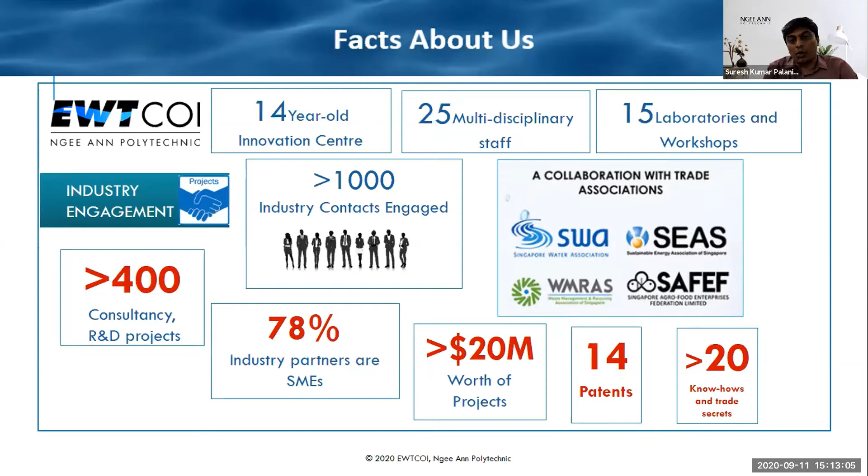We have 78% of industrial partners from SMEs. Out of it, we have secured more than 20 million worth of projects. We have 14 patents and more than 20 know-how and trade secrets. We also have good collaboration with trade associations like SWA, SEAS, and WMRAS.

In EWTCOI, we have 4 technological domains: membrane technology, energy efficiency, water technology, and sustainable material technology. We work on 3 thematic areas: membrane and water innovation, industrial resource innovation, and green building innovation. Today, I am going to talk about our sustainable material technology, where I'm working.

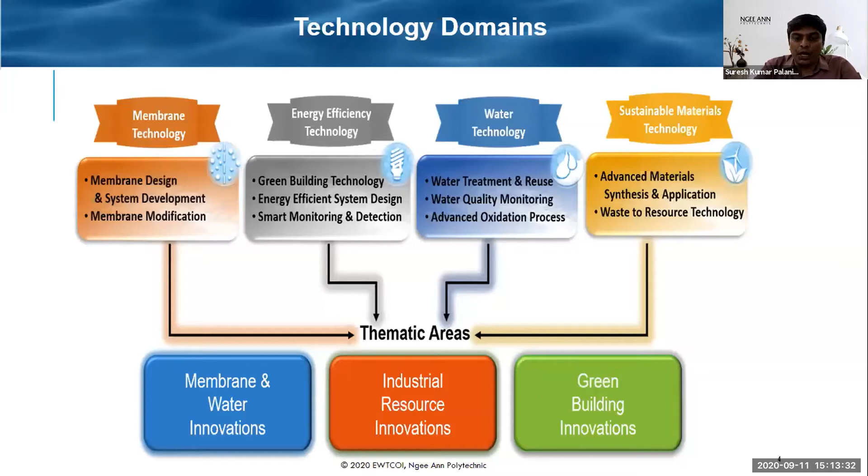Sustainable material technology has 3 focus areas: waste management and recycling, which works on lightweight concrete and foam glass material from waste glass; advanced material from CNT and activated carbon; and we also started working on sensors and supercritical extraction.

We are also working on sustainable eco product and process, in which we are working on smart coatings and cool paint, which have the functionality of self-cleaning and anti-reflective coatings. The key idea is we are working on nanofiber, and it's related to IAQ.

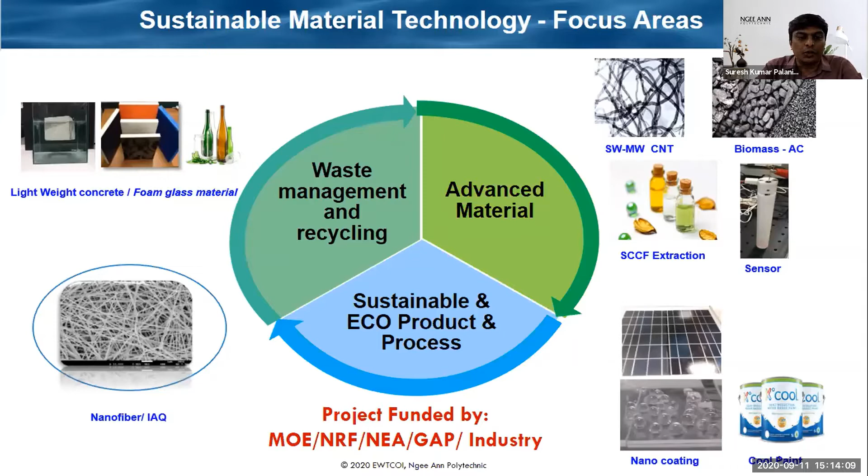All these projects are funded from government agencies and industrial projects. The general facts and stats of IAQ: according to WHO, every year 7 million deaths are due to indoor and outdoor air pollutants. Of those, 1.6 million are due to indoor pollutants, because we spend almost 90% of our life indoors.

Based on the literature, it is found that indoor environment can be up to 50 times more polluted than outdoor. So poor indoor air quality will cause sick building syndrome due to headaches, eye, nose, or throat irritation, and also respiratory problems. This will lead to productivity loss.

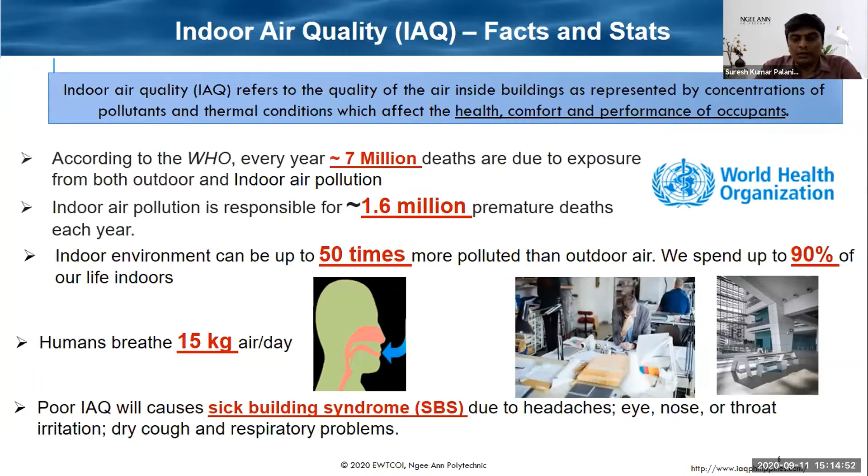So why does indoor air make us sick? There are 6 key components: odor, volatile organic compounds from furnitures and construction materials indoors, fine particulates from smoke or cooking areas, microfibers, mold from indoors, and nanosized particle pollutants from the outdoor environment.

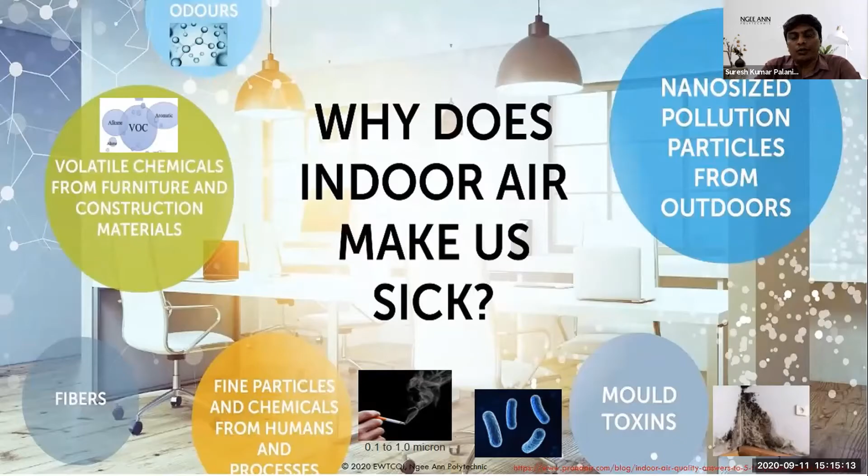So in EWTCOI, we have nanofiber technology for air filtration. This nanofiber has a key advantage over existing fibers. For example, microfibers like melt blown cannot filter out particles of 2 micrometers, whereas this nanofiber has a key advantage.

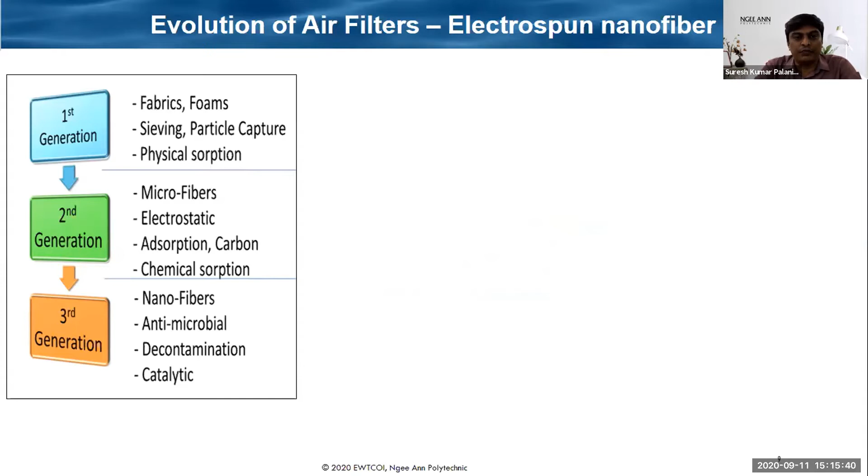It has antimicrobial functionality, decontamination, and catalytic functionality. The key thing is nanofiber can be developed using the electrospinning process. Based on recent literature, this nanofiber has a market potential of 3 billion by 2024.

The key advantage of nanofiber is it can be produced as both polymeric and hybrid nanofibers. It can control different nanofiber structures. We can embed this nanofiber with metal particles and nanomaterials, and we can tune the nanofiber size as low as 50 nanometers, and then also tune the pore size at the nanometer scale.

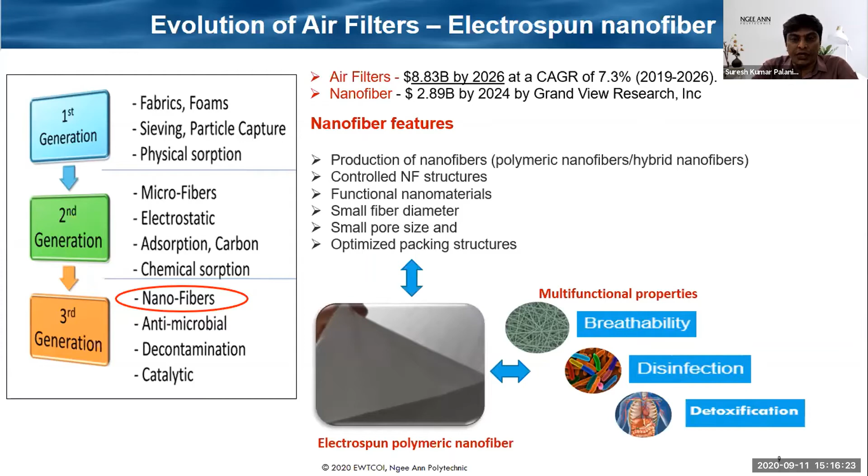We can also optimize the packing structure of this nanofiber into stacks, which has multifunctional properties like breathability, disinfection, and detoxification. This electrospinning process has 3 different parameters: solution property, process conditions, and ambient condition. By tuning these process conditions, we can optimize the fiber diameter to as low as 50 to 100 nanometers, with increased surface area for selective VOC or other pollutant capture.

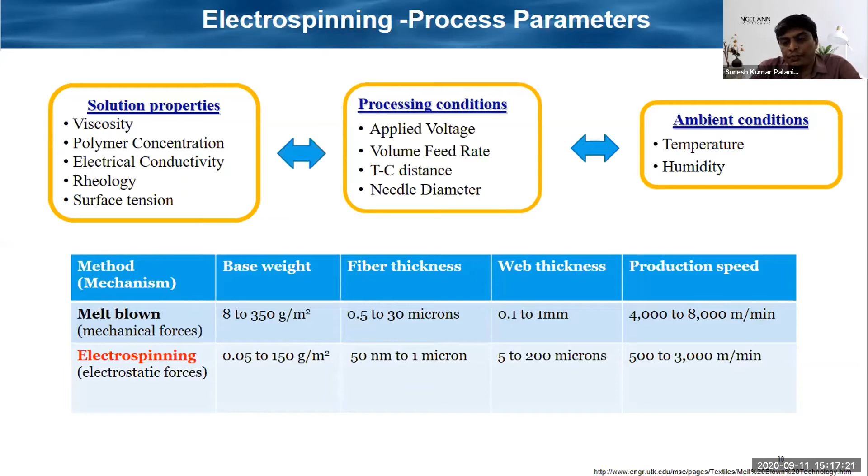The productivity range of melt-blown is around 4,000 to 8,000 meters per minute, whereas electrospinning is around 500 to 3,000 meters per minute. However, there are companies working on production of this nanofiber at a higher rate.

In EWTCOI, we have two patent background IPs on nanofiber: one on preparation of nanofiber and the other on production of nanofiber. One project is funded by NRF, where we work on triple layer nanofiber filters, which have specific functionality beyond particle filtration and bacterial filtration efficiency. This nanofiber has a detoxification efficiency of more than 95%.

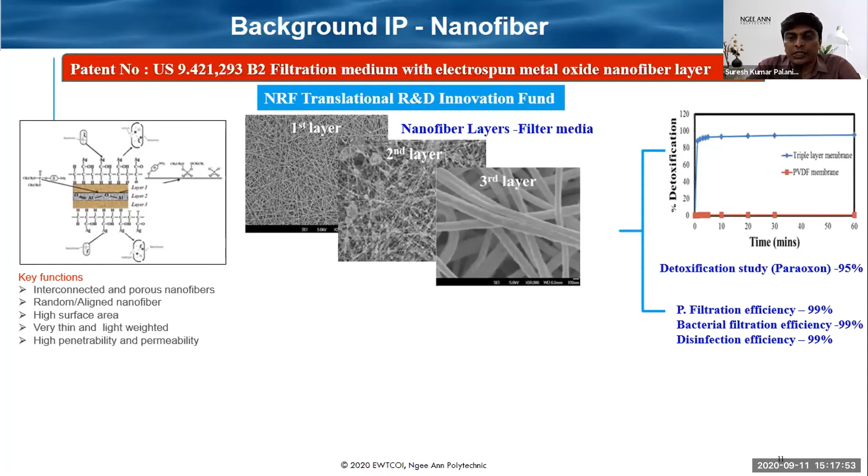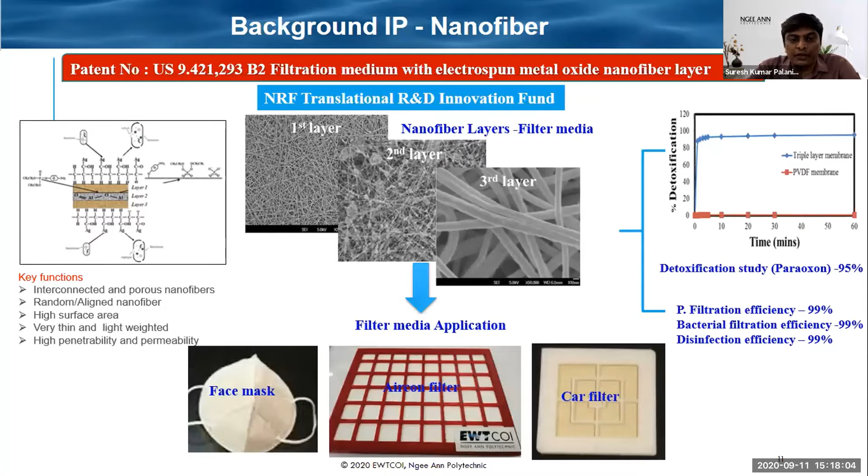We studied with Paraoxon as a nerve agent, which shows this triple layer with metal oxide embedded particulates has an efficiency of 95%. We are looking at applications like face masks, aircon filters, and car filters.

The basic comparison of our nanofiber with existing filters and face masks shows our nanofiber-based triple filter has aerosol filtration efficiency of more than 99%, and bacterial filtration efficiency more than 99%. However, the added advantage over other filters is additional disinfection and detoxification efficiency. The key advantage is we found no leaching of any heavy metal ions from our fibers.

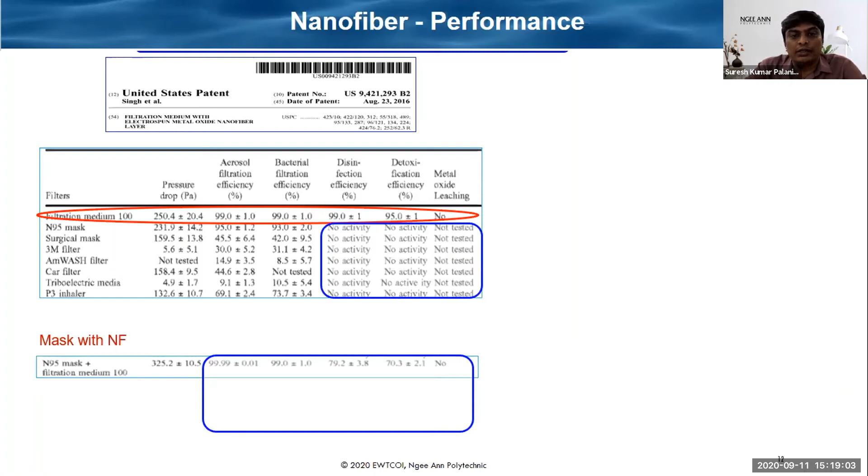This figure shows existing masks and filters which have no disinfection or detoxification activity. We also have the advantage that this nanofiber can be embedded in masks, and we tested it with commercial N95 masks with our nanofibers, showing improved aerosol filtration efficiency of more than 99.99%, while also adding disinfection and detoxification functionality.

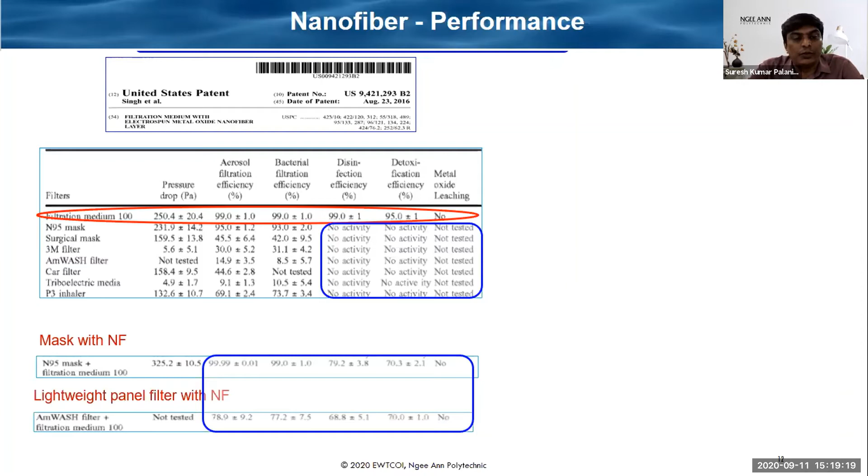For this N95 mask, we observed efficiency of 79% for disinfection and around 70% for detoxification. We also tested the nanofiber with lightweight panel filters, where the efficiency for disinfection and detoxification is around 70%.

We also found recent literature on breathability comparing nanofiber filters and melt-blown filters, which clearly shows nanofiber has a better advantage over melt-blown filters. The air and moisture transmittance, and odor-related CO2 transmittance, are more comfortable with nanofiber than melt-blown filters.

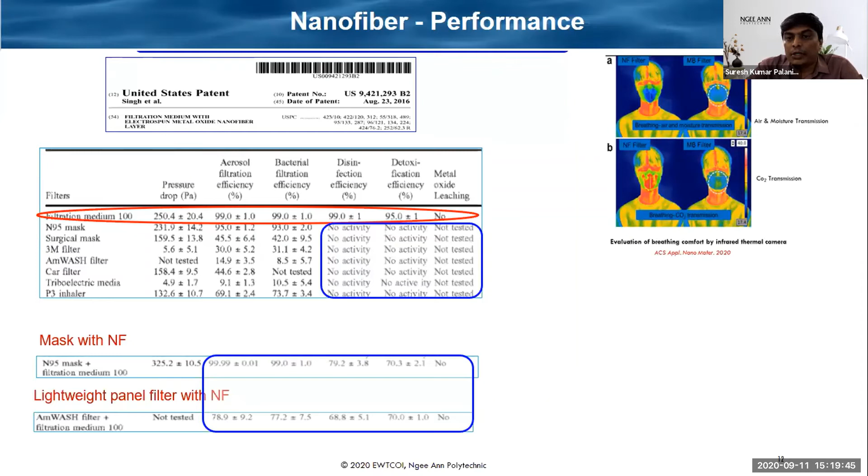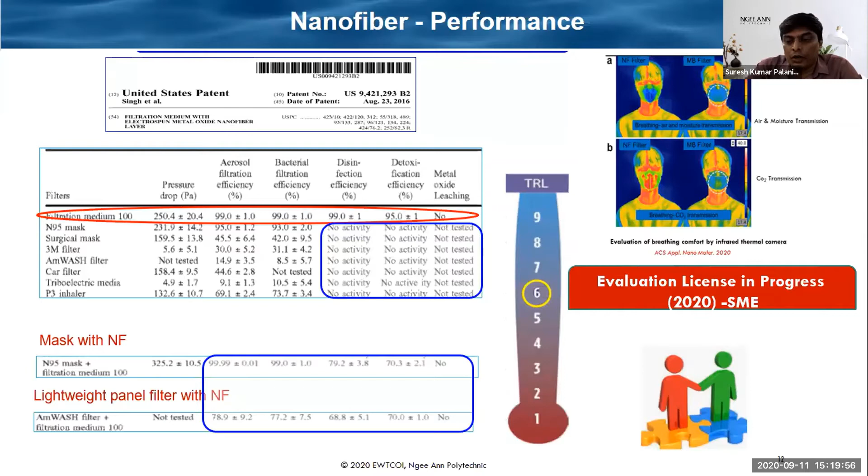Right now, the IP is at TRL 6 and above. We are working closely with local SMEs on evaluation and licensing, and we are now planning for scale-up and testing of this IP.

We have a second IP on the production of nanofiber, specifically the continuous production of nanofibers. We already developed a prototype setup in our lab, and we have also demonstrated this system in an operated environment.

At the current rate, our in-house setup is producing around 700 meter square per hour. However, we are openly looking for an industrial partner who can scale up for a higher production rate, and also looking for advanced technology.

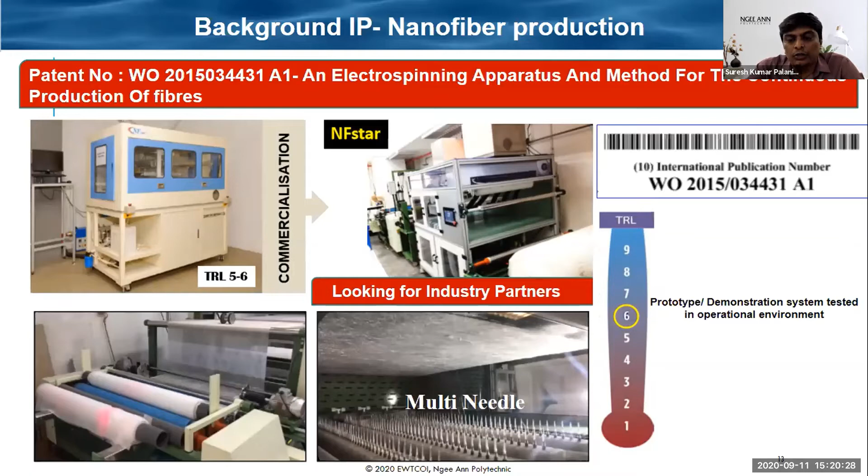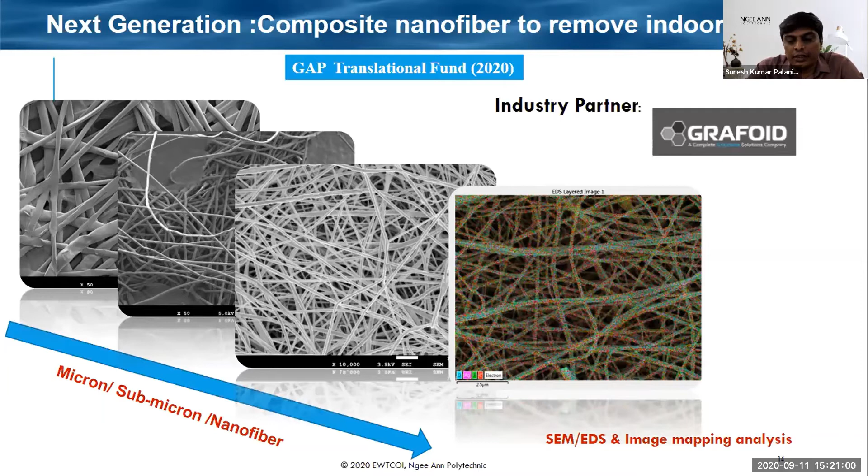Next, we are working on next generation composite nanofibers to remove indoor pollutants. This project is funded by GAP this year, in collaboration with an industrial partner, Grafoid, a manufacturer of unique graphene-based nanomaterials with different porosity. We are already in progress working on a few membranes of these graphite-based nanofibers, trying to apply next generation reusability and flexibility of nanofibers with high mechanical strength.

Other than nanofiber, we are also working on nanocatalytic filters for high indoor detoxification, targeting applications like indoor cooking facilities. The main advantages of this filter are that it is flexible, washable, thermally stable, and has a high surface to volume ratio.

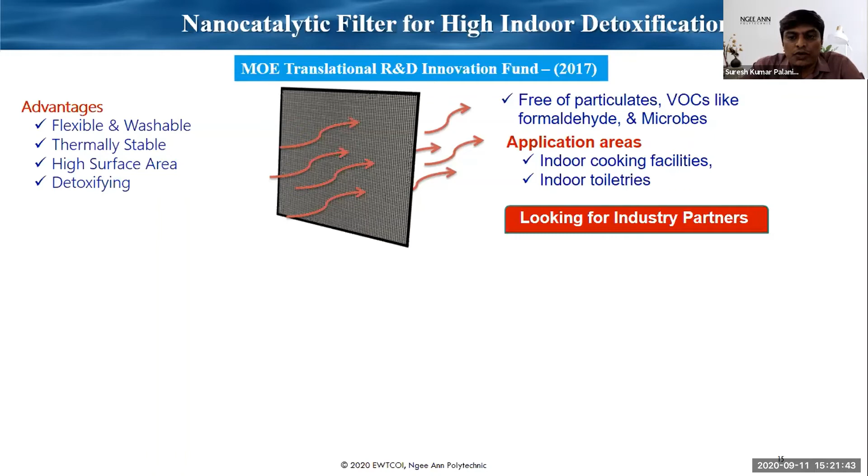We have our own coating functionality where we coat the surface of these flexible metal filters. We are also looking for an industrial partner who can work with us to test these filters at the site and perform evaluation. This is an example of different nanostructure materials on a metal mesh.

Apart from technological capability, we also have IAQ testing capability at EWTCOI. We work on the Singapore standard SS554. These are the test parameters we closely consider for performance evaluation of systems, like thermal comfort and chemical parameters such as carbon monoxide, carbon dioxide, formaldehyde, total VOC, and ozone.

These are the parameters we can test in our lab to evaluate system performance. In terms of particulate matter, we can test for PM10 and PM2.5. We even have equipment that can go down to ultrafine particles, from PM0.1.

So we also have equipment like biological parameter testing. We can test the bacterial and fungal counts.

BCA has a green mark scheme since 2005. So one of the key things is to have environmental friendly buildings, and key assessment criteria for BCA green mark is you should have indoor environmental quality for better health and well-being.

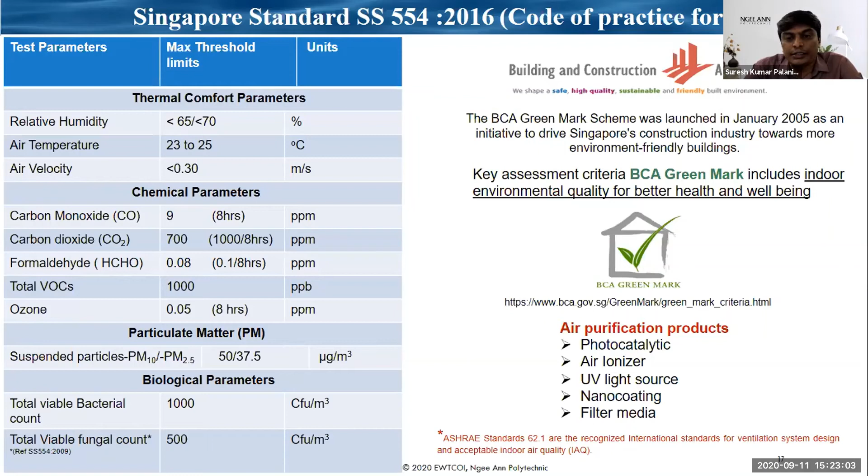So we are in the range of testing different kinds of air purification products like photocatalytic based air ionizer, UV light source, nano coatings, and filter based media. We are open for testing any kind of this product with respect to the standards of Singapore.

So IAQ testing for filter media, we have an automated filter testing system in our lab, which can measure the filtration efficiency and the pressure drop of filters with particle sizes from 0.1 micrometer to 0.3 micrometer, both solid and liquid.

We can also perform VOC studies of any filters with a specific concentration of VOCs like formaldehyde and toluene indoor VOCs, and we can evaluate the performance of those filters.

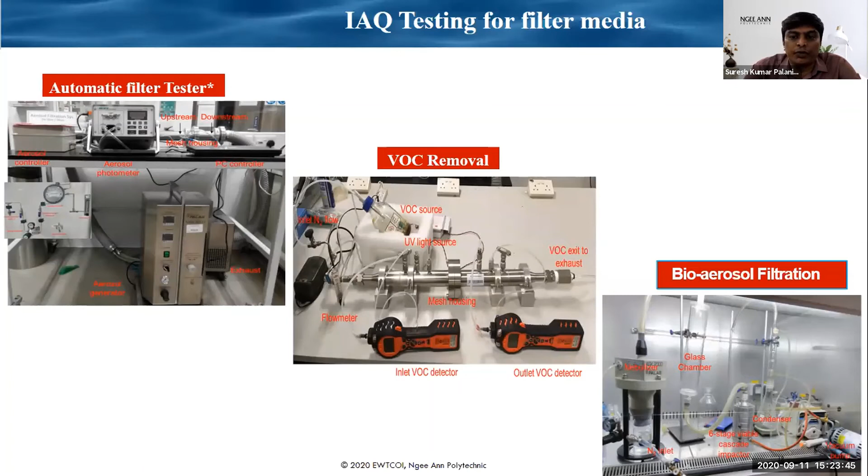We also have the biological aerosol filtration setup, which can identify the biological efficiency of your filters. In addition, EWTCOI is also getting new IAQ systems, one being an automated filter media tester system, which can measure flat sheet media from 50 centimeter to 100 centimeter.

We also have two sensors, a portable IAQ sensor and a condensation particle counter. This sensor can measure particles from 10 nanometer to 0.1 micrometer. We have also engaged many SMEs for performance evaluation of their portable systems.

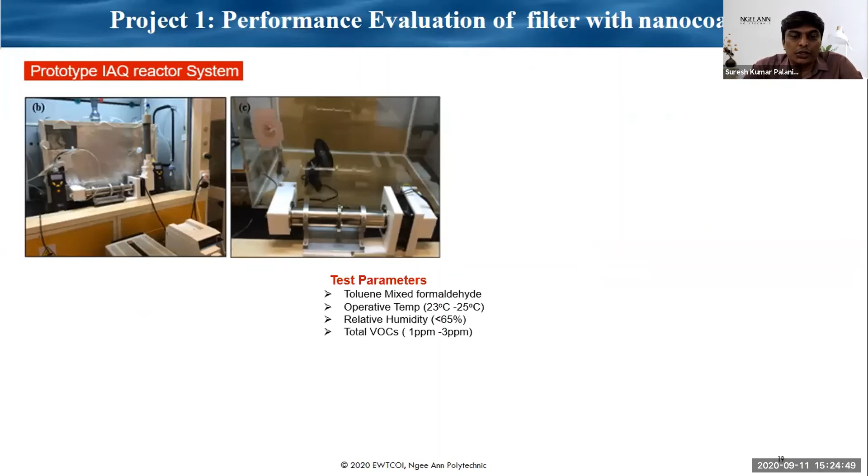We then performed performance evaluation of this coating with the filter for different VOCs like toluene and mixed formaldehyde, with an operating temperature between 23 to 25 degrees and relative humidity less than 65. The performance shows these filters with embedded nano coating have good degradation of VOCs like formaldehyde and toluene. Now the company is taking this nano coating for filter end-user applications.

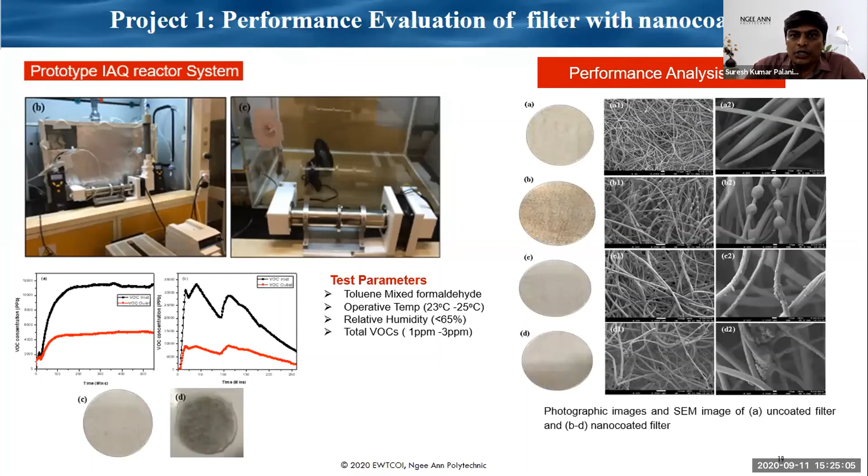The second project, we worked with one of the local SMEs to evaluate the performance of an air ionizer. Basically, these ionizers are used to remove particulates of different sizes. However, the company was interested to find an additional advantage over existing systems in the market.

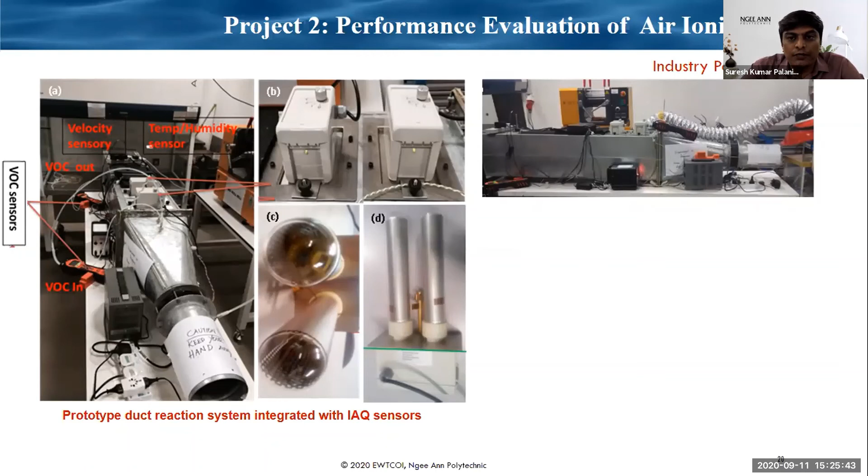So we developed a prototype duct system integrated with different IAQ sensors like temperature, humidity, velocity, and VOC sensors to measure the inlet and outlet flow of different VOCs. We purged formaldehyde and toluene with dynamic flow rate, and measured the degradation performance with particulates and VOCs.

Our initial findings show these VOCs with this ionizer have good degradation performance with respect to time. This client has implemented this ionizer at sites with high concentration of particulates and VOCs, and we also studied the side effects.

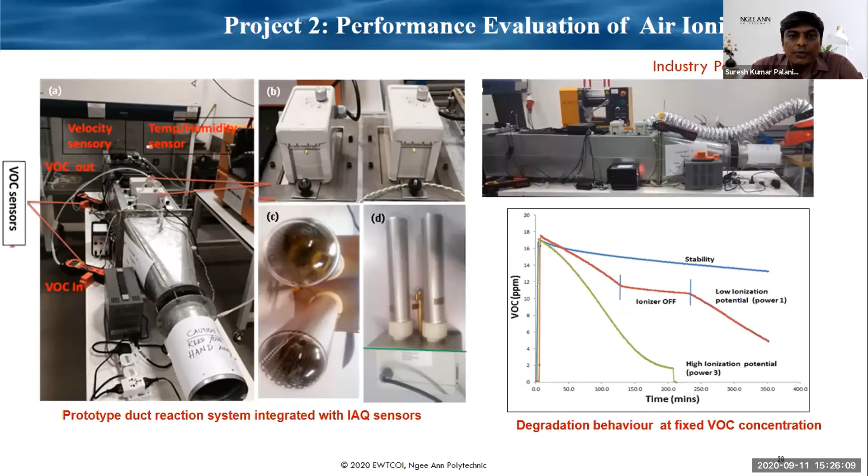We also studied this ionizer for ozone measurement, which can emit at the standard limit of 0.05 ppm per hour.

Apart from this, EWTCOI has a few services which we can provide to clients, like technology consulting for technology scale-up and technology validation. We also do contract research, working on proof of concept projects, proof of value projects, or new technology development for clients.

For standard service package, we can work on testing and material characterization and other small testing purposes. For facility usage, we are also open for use of our facilities, with different facilities for water, materials, and membrane.

We are also conducting trainings from CET courses, and we also have customized training for clients.